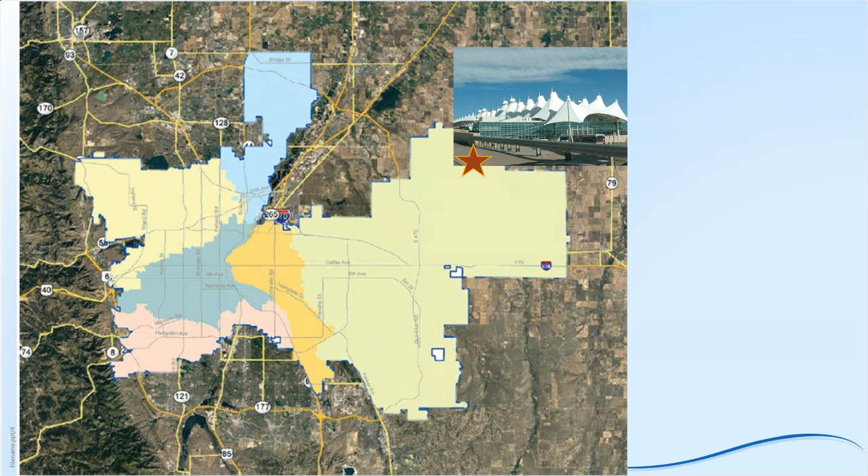So if any of you have traveled out to Denver, this is an aerial photo of Denver. You can barely make out the mountains on the left side of your screen here, just the foothills beginning of the Rockies. And what's shown in color is the service area. They have 6 basins, drainage basins within this district, and multiple connectors. If you need to get your bearings straight, you've probably at one time or another flown into the Denver International Airport, out on the east side of town. The downtown skyline, you can see the Rockies in the background there with a beautiful bright sunny day, and that's kind of where that sits on the map.

And then if you've ever had a chance to get out here and see a concert at the famous Red Rocks, that's on the west side of their service area for this particular district. So hopefully that helps everyone get their bearings straight and remember, if they've traveled out to Denver, where these features are. With respect to the treatment facilities, this whole service area is about 715 square miles, and it's a regional facility district that has 38 connector agencies, total of about 1.8 million customers throughout this entire service area. They operate 2 wastewater plants.

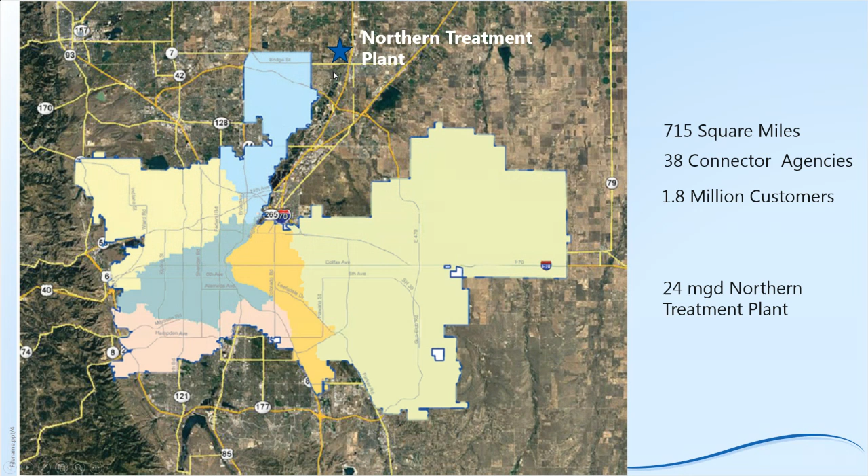Brand new plant that was just opened this year, started treating wastewater maybe 3-4 months ago. It has 24 MGD total capacity with the ability to expand up to 50 MGD, and they call that their northern treatment plant.

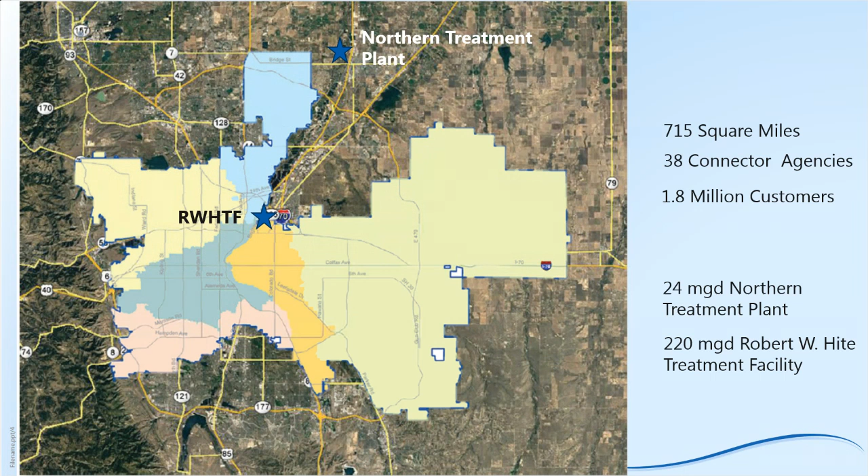And that serves some of the drainage area up on the north side of their service area. The facility we'll talk about today is the Robert W. Hite Treatment Facility, and that is their large facility. This is the largest wastewater plant west of the Mississippi all the way to the coast of California, at a 220 million gallon per day capacity.

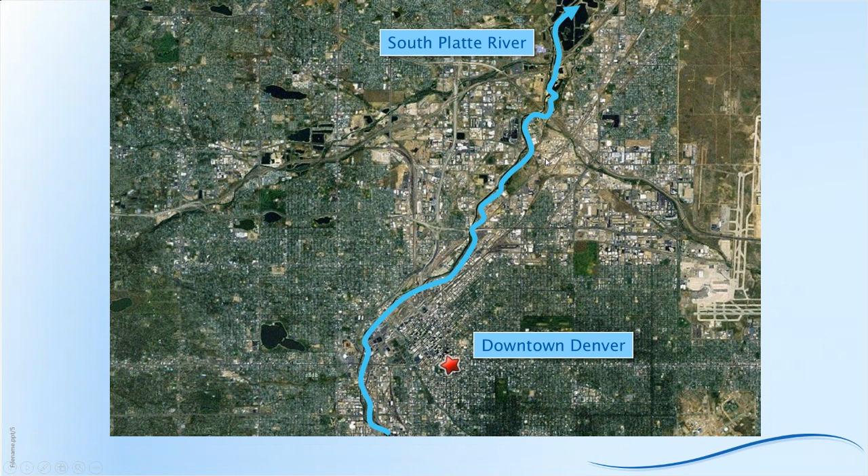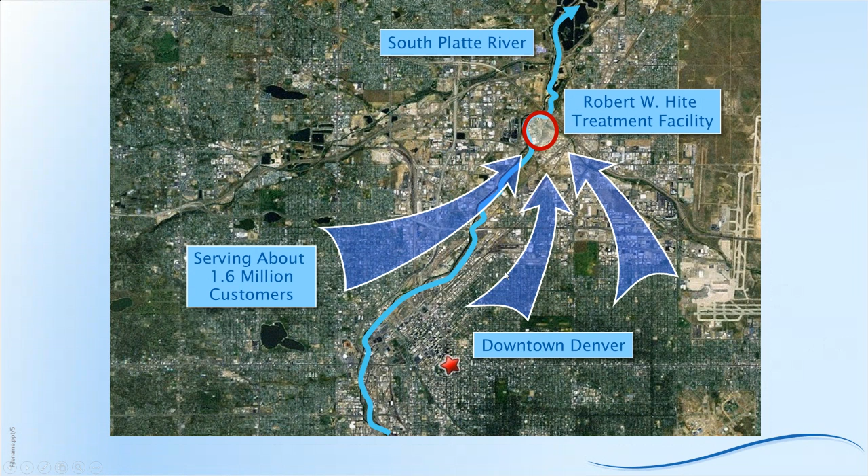So if I zoom in a little bit more on Denver, you can see DIA out here on the right-hand side, downtown in the center there. I traced the South Platte River, and in Colorado, the South Platte River flows north, eventually joining up all the way out to the Mississippi River. Where the river takes a big bend north of town, that's where the RWHTF treatment facility is located, and that particular facility serves about 1.6 million of their 1.8 million customers.

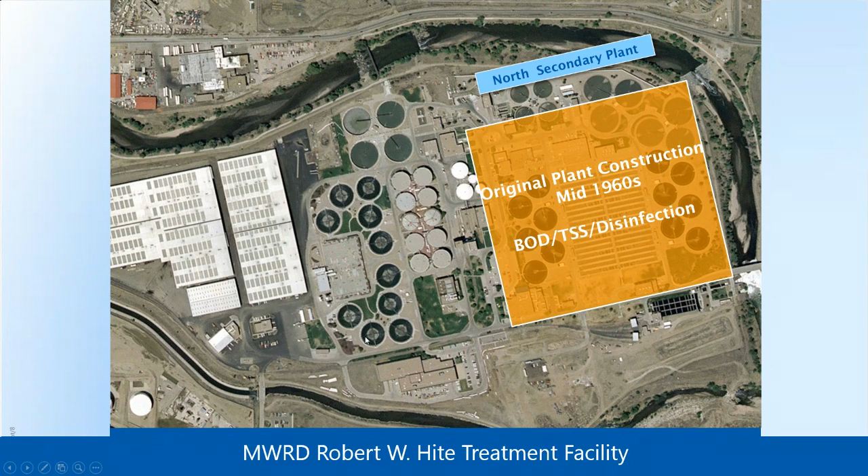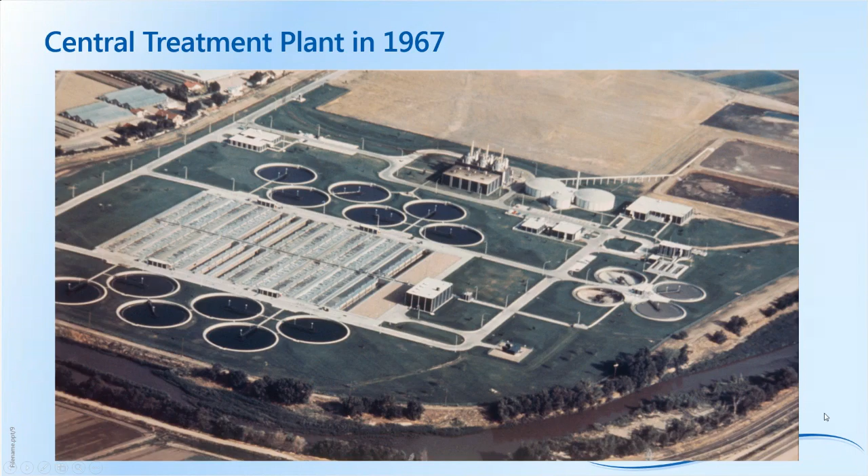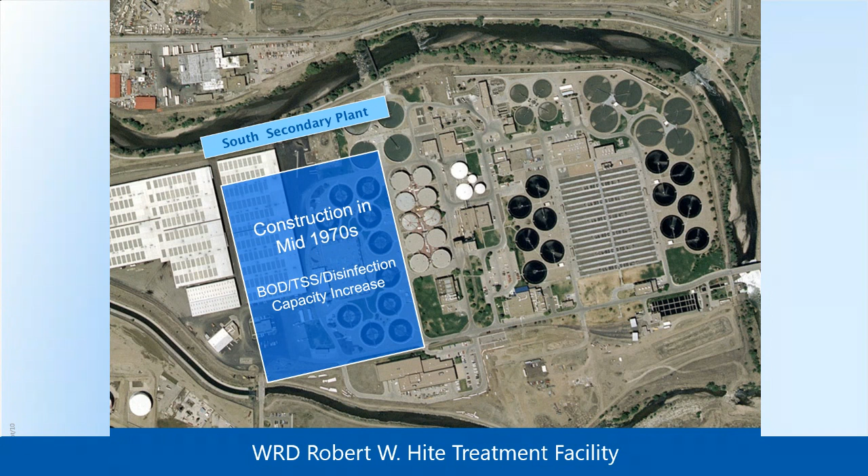With central digesters for solids handling, anaerobic digesters. You can see the pure oxygen activated sludge aeration basins here, surrounded by the 10 secondary clarifiers.

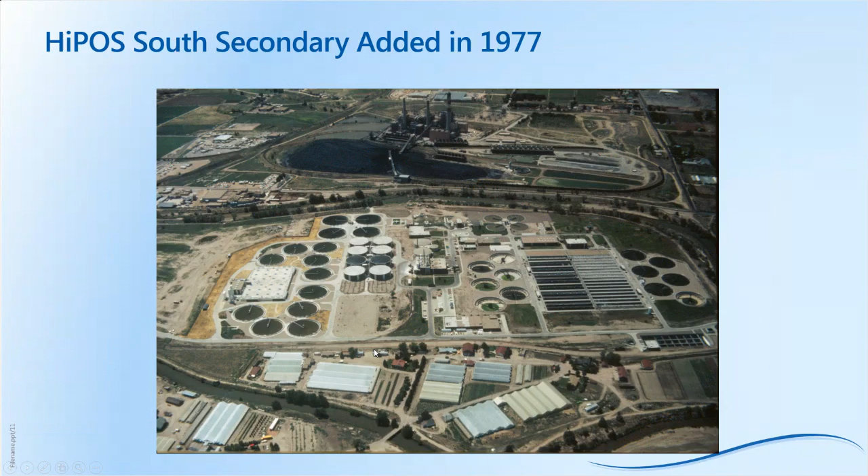In the early 1990s, nutrient criteria began to get more stringent on the South Platte River, and they modified the north complex to provide nitrification and partial denitrification. They combined the effluent from the pure oxygen south facility and the modified north facility to meet a seasonal effluent ammonia somewhere between 9 and 13 milligrams per liter, and a combined effluent nitrate of about 16 milligrams per liter. That was an improvement over no removal of nutrients under the former configuration.

This is an aerial photo from 1993 of the facility after the nitrification modifications were made. You really can't tell too much - most of the modifications were internal, plus the addition of a second blower building to accommodate the air demand for nitrification.

The sheds at the bottom of the photo are compost sheds. At that time, they composted about 10% of their total biosolids, and the remaining portion was applied on the METROGRO farms and some other farms east of Denver.

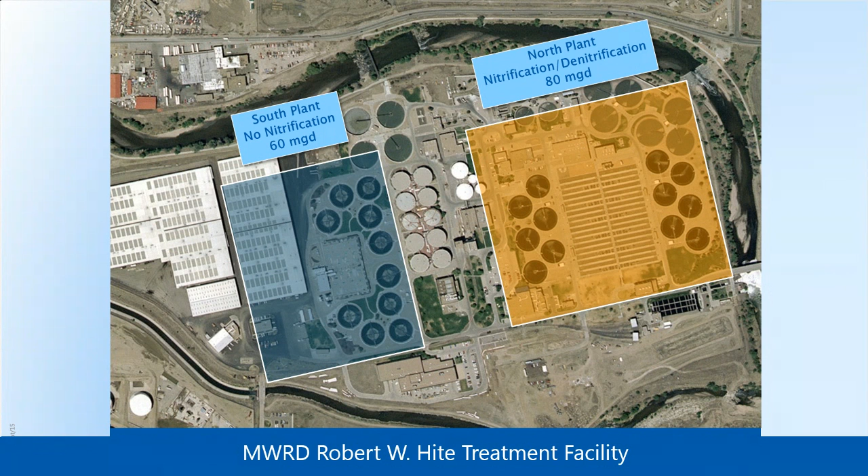So in the early 2000s, the district knew they were going to face more stringent discharge criteria on the South Platte, and they had to plan their strategy for nutrient reduction. At that time, the north facility effluent could nitrify, so their ammonias were generally less than 2 milligrams per liter, but only partially denitrify, so they were putting out about 12 to 17 milligrams per liter of nitrate.

That was combined with effluent from the South Plant. Now, the South Plant, being a pure oxygen activated sludge plant, did not remove any ammonia, so the ammonia that went out of this plant was essentially the ammonia that came in the raw wastewater, somewhere between 18 and 24 milligrams per liter.

At the same time, they didn't produce any nitrate because they weren't nitrifying. So the combined effluent was somewhere between 9 and 10 milligrams per liter of ammonia. They split the flow approximately 50-50 on an average day between the North Plant and the South Plant, so their blended effluent was about 50% of each of these effluent water qualities.

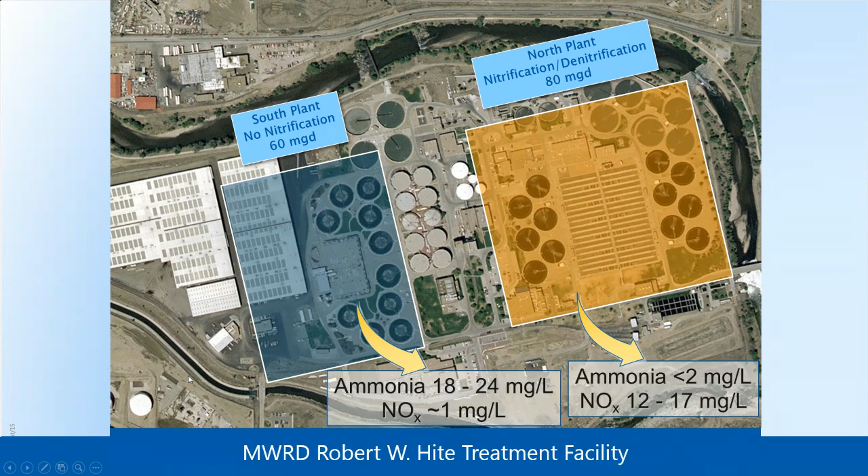And they decided the first step had to be improvements in the north secondary complex. The reason they needed to do that is because it was clear that the only way to modify the south secondary complex for improved nutrient removal, both ammonia and nitrogen, was to take at least half of the capacity out of service at a time to make those modifications.

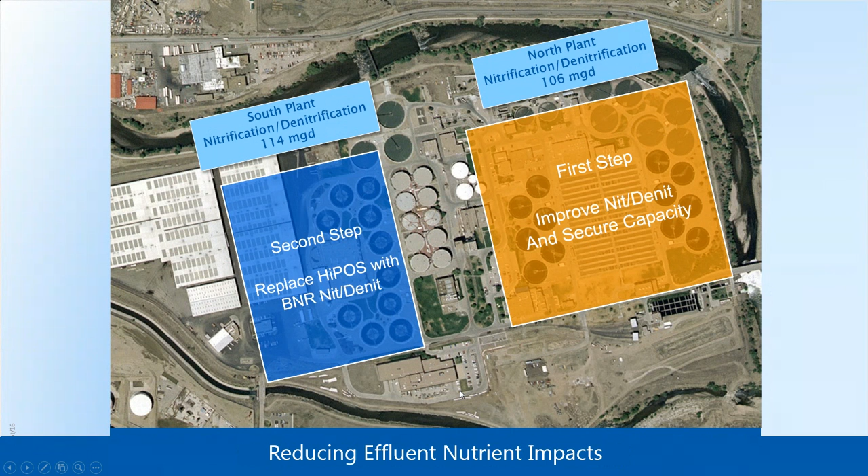In order to take half of the capacity out of service, they needed to gain capacity in the north facility. So that's what they did first, and that design started in about 2004 and finished up, and then was succeeded by the second step, which was to replace the pure oxygen facility with a BNR facility capable of nitrification, denitrification, and even modifications in the future for phosphorus reduction.

So one of the interesting things that came out of this plan was developed, the design, in about 2004 for the North Complex. And in 2004, the industry was beginning to think about side stream treatment as a big benefit to our treatment plants, but there weren't a whole lot of facilities practicing side stream treatment.

Today, side stream treatment is a major part of many agencies' game. They understand that if they have to meet a nutrient criteria and they can remove that in a concentrated form from their return streams if they have anaerobic digestion, then it's much more cost effective.

But this was relatively early in the development of side stream treatment process, and the district elected to use a process called CaRRB. Now, some of you may or may not have heard of CaRRB. There's a lot of talk about Anammox-based side stream treatment, and CaRRB is an aerobically based side stream treatment that essentially means Centrate and RAS Re-aeration Basins.

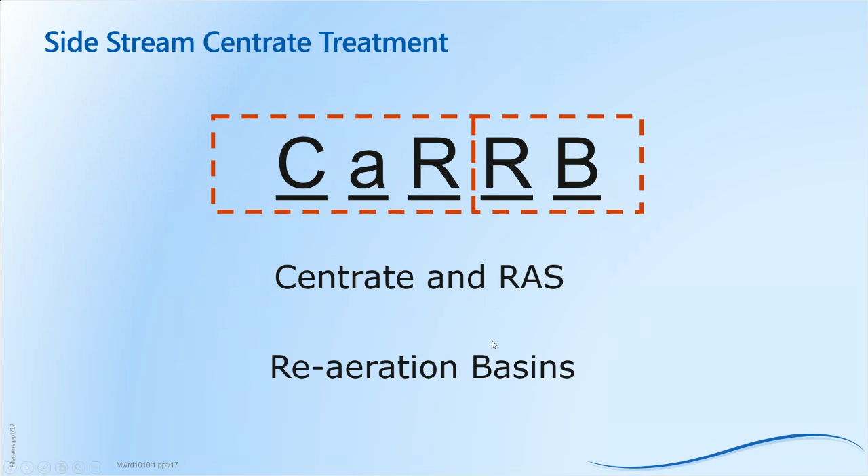I'll show you what the CaRRB looked like in the north complex, and then I'll show you how CaRRB was incorporated into the south secondary complex as well. So the reason that CaRRB and side stream treatment in general is attractive to the industry is the cost-effective nature of it.

This agency looked at expanding the north complex by adding 2 more aeration basins and 2 more clarifiers. Their clarifiers are 30-foot diameter in the north complex and about a 2 million gallon aeration basin. So the cost of that to gain 18 MGD was about just under $40 million. On a unit cost basis, that's about $2.25 per gallon of capacity increase.

They compared that to side stream treatment, which they could gain 22 MGD of capacity at a cost of about $21 million, which equates to just under $1 per gallon. So we're looking at about a 50% capital cost savings by doing what they needed to do in side stream treatment rather than mainstream treatment. And that number, I think, is generally reasonable, about half the cost for most other agencies across the country to use side stream versus mainstream treatment if you have the opportunity.

So I would encourage everyone to be looking at side stream treatment if they have nutrient challenges in the future, because it can be a very cost-effective opportunity.

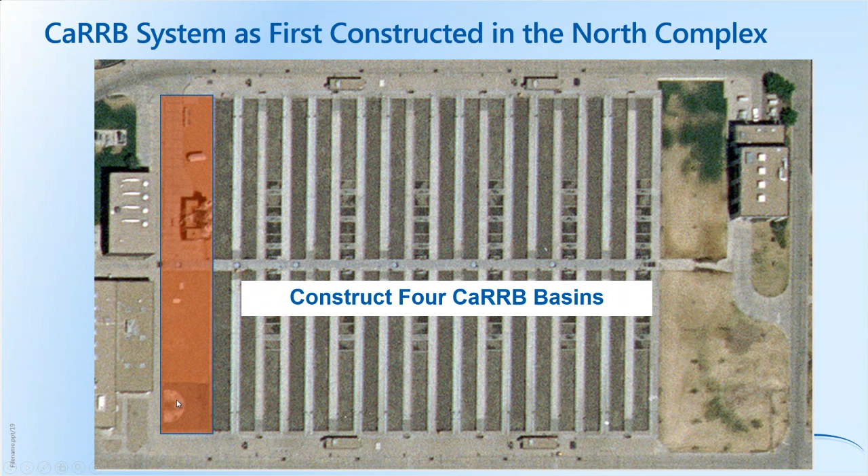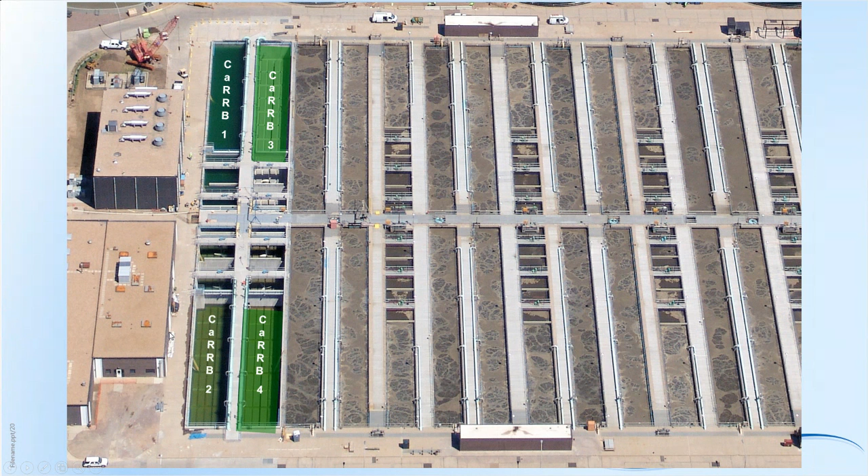So this is an aerial photo, a little bit grainy, of how they incorporated CaRRB into the north complex. They constructed 4 CaRRB basins in the area that was actually available where aeration basins were not currently constructed, and this is what those 4 basins look like. They're essentially parallel — I'll show you the flow pattern in a second. This is an aerial photo of the 4 CaRRB basins after they've been constructed. The odd-numbered CaRRB basins match up with the odd-numbered aeration basins on the top of the page, and the even numbers on the bottom match up with the even-numbered aeration basins.

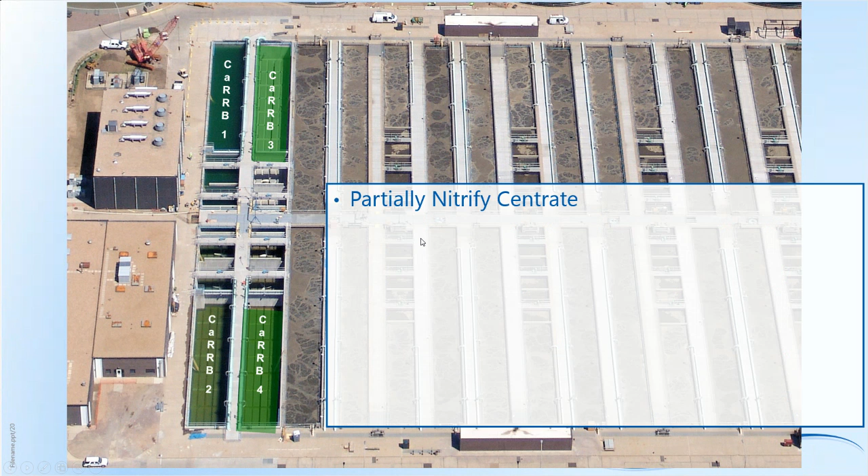So the advantages of CaRRB as a side stream treatment is they're able to partially nitrify the centrate return. And in this case, because all of the centrate from the entire plant was treated in the north complex only, there was an imbalance compared to normal plants with the ammonia load from centrate that comes to this north plant. So this CaRRB treatment for side stream was very beneficial and important in this case.

CaRRB not only partially nitrifies the centrate, but it generates nitrate for denitrification in the anoxic zones of the BNR facility. It's kind of equivalent to the function of internal mixed liquor recycle. So where a normal plant might use a rule of thumb of 300% internal mixed liquor recycle for denitrification, this facility only has about 200% IMLR because the CaRRB basins provide the rest of the nitrate to be denitrified.

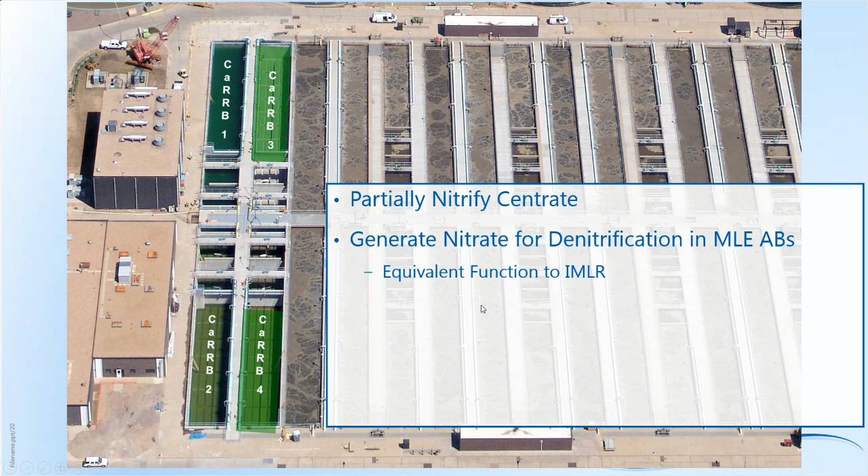Also in CaRRB, it runs off a RAS feed. RAS is generally about twice or a little bit higher concentration than the mixed liquor in the aeration basins. Because they're running at 6,000 milligrams per liter, the size of the CaRRB basins required for nitrification are significantly smaller, about half of the size of conventional treatment. This also allows the agency to reduce the mixed liquor in the aeration basins so they can reduce the solids loading on the secondary clarifiers.

The secondary clarifiers were the capacity limiting process at this particular plant, and anything they could do to reduce the loading or improve the performance of the clarifiers was necessary.

The other big benefit of the CaRRB side stream treatment is essentially we're growing nitrifiers in a very high ammonia concentration environment with the centrate as the substrate. And therefore, I like to call them super nitrifiers that are grown there. The nitrifier population is very strong, robust, and high, and that is fed back into the mainstream process, which bio-augments the performance of the mainstream process.

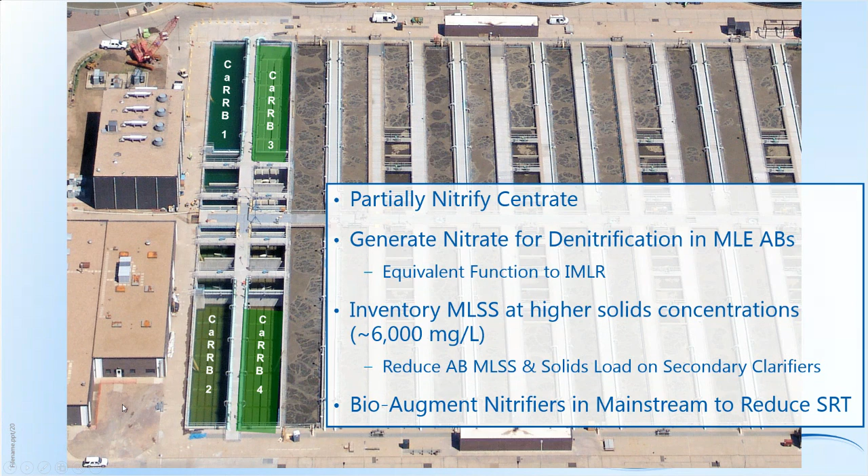I'll give you an example. The mainstream was designed for an aerobic SRT of about 4.3 days, and this agency, after they put CaRRB online, tried to see where the bottom was, and in the dead of winter ran the aerobic SRT down to 3.5 days without a breakthrough of ammonia. That represents about a 25% reduction in SRT over what they were designed for, and we do believe that some of that reduction is definitely due to the bioaugmentation properties of a side stream treatment in this manner.

So that's all kind of a setup for the grand prize winning project, the South Secondary Improvements Project. Let's take a quick look at that.

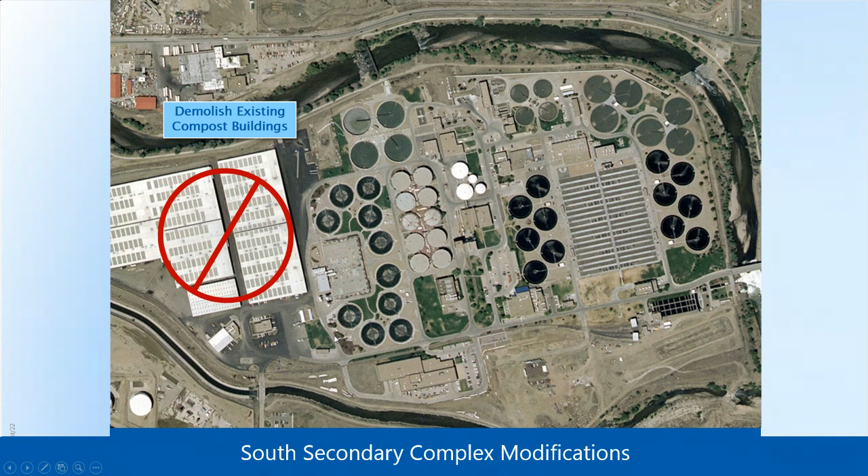The first thing that the agency had to do in order to modify the South Secondary Complex from pure oxygen to BNR activated sludge was to demolish the compost buildings to make room for the new facility. After those were demolished, they were able to construct a new BNR activated sludge plant. You can see the size of this is about 3 times the size of the pure oxygen aeration basin.

That makes sense because pure oxygen runs at somewhere between 1 to 1.5 days SRT biomass, and BNR runs somewhere between 4.5 to 6 days. So generally, we're looking at 3 to 4 times the aeration basin volume when moving from pure oxygen to BNR activated sludge, and you can see that with the footprint difference here.

At the same time they were building the new BNR activated sludge, they had to modify the west HiPOS. Those pure oxygen basins were no longer needed, and that space was valuable for some of the new facilities that had to be constructed to make the whole system work and perform at the right level.

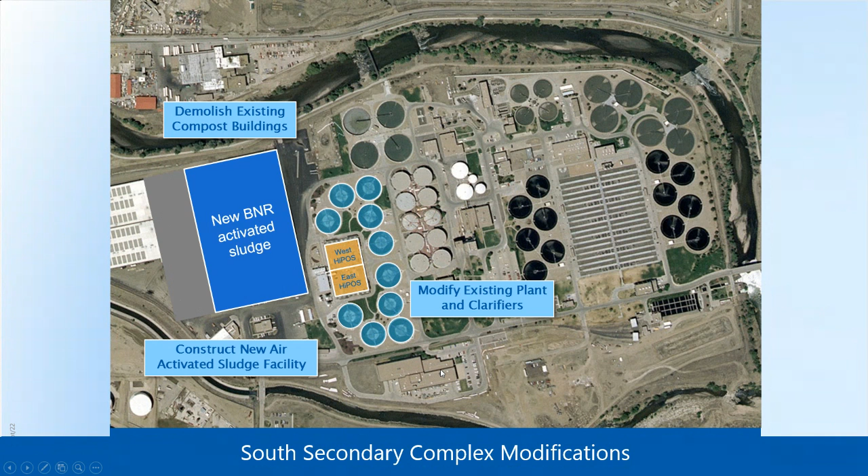Once that was completed and half of the facility was online, they then took out the east HiPOS and made the exact same modifications on the east side and are currently now running with all the facilities in service.

So in order to accomplish this, we have to take a stepwise approach moving into the project. The first step was to demo the composting buildings to clear the site and prep the site both with some pre-excavation and some utility relocations in order to construct the new facility.

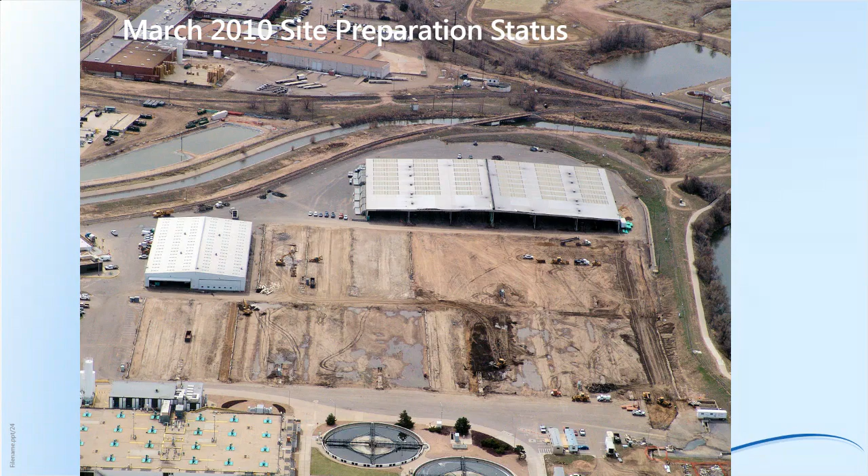That began in about January 2010. In March 2010, a couple months later, we can see that the compost buildings are largely removed. In September 2010, they began working on the pre-excavation of the area that the new facility would be constructed in. And by January 2011, just about the time that the larger project was bid, the site was cleared, all the utilities were relocated, and some pre-excavation had begun to expedite the construction of the aeration basins in this area.

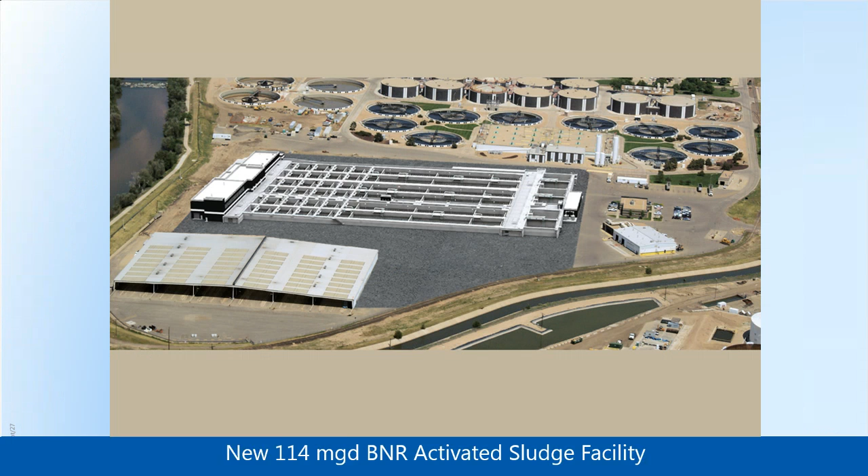So what was built in the area? Let me give you a quick tour. The facility has a capacity of 114 MGD out of the total 220 at this site. It consists of 6 parallel aeration basins, and these are single-pass aeration basins.

There's a conventional, probably urban legend, that BNR aeration basins have to be multiple pass to make it easier for mixed liquor return through the wall, to make them more cost-effective. And that really isn't the case. Any configuration of passes is acceptable for BNR. This particular design is a single pass, and there are several examples of single pass BNR basins throughout the country. So that's the aeration basins. The head part of the aeration basins is the anoxic zones for nitrate reduction, and in fact there are some anaerobic zones as well in this design that allow for future biological phosphorus removal.

CaRRB was also incorporated into the South Secondary, for side stream treatment of the ammonia return from dewatering of anaerobically digested sludge. In this case, we started with a clean slate, so we were able to locate CaRRB in an ideal position for the best, most cost-effective construction of the facility. It happened to be at the tail end of the process, and I'll show you the flow pattern momentarily.

We created a west mechanical building, and this supported the cost effectiveness of this facility. Not only were all of the aeration basins common walled together, but the main mechanical complex was all in a single building in 3 parts.

The first part in red is the primary effluent pump station. They did have to lift into this plant because the hydraulic profile of the existing plant had the primary treatment at a lower elevation than secondary treatment. So they were lifting into the pure oxygen basins, to catch the hydraulic profile that existed in the existing plant.

The second main portion of the west mechanical building is the blower building, and this is where all of the blowers, air supply equipment for the complex is housed.

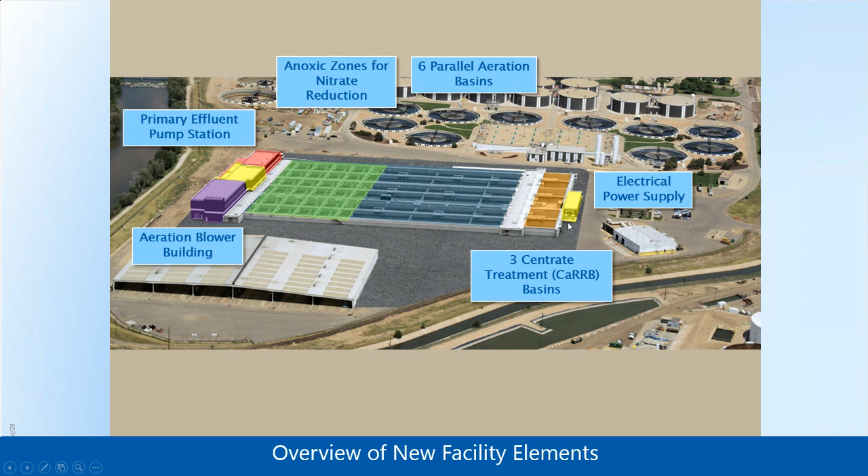In between the pump station and the blower building, where almost all of the load for this facility resides, is the electrical power supply, shown in yellow. That also added to the cost effectiveness, all in the same building. The wiring costs, the amount of copper, the line losses, all were dramatically reduced by placing that building in between the 2 highest loads. There was a second electrical building on the east side of the complex to supply some power needs on that side.

The facility includes mechanical equipment and piping utility galleries: a west gallery located alongside the west mechanical building, a central gallery, and an east gallery. These house all of the equipment so that in inclement weather, cold times in Denver, they're able to do all of their work inside on this facility where most of the piping and mechanical equipment resides.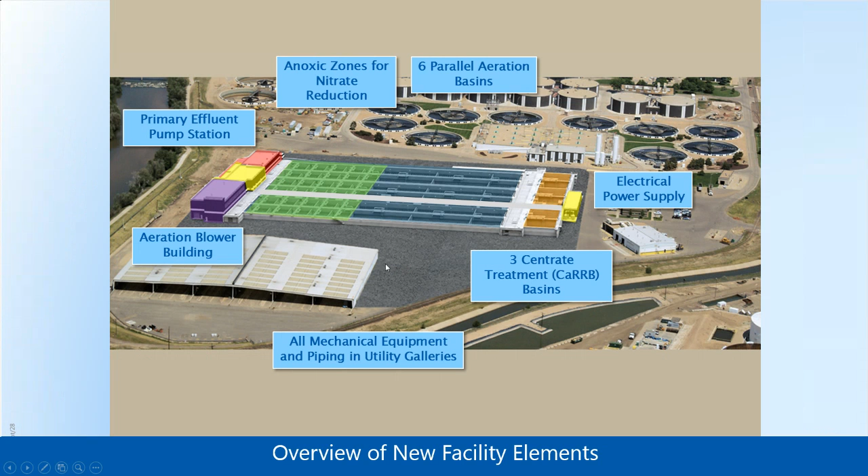After the aeration basins, we flow to the existing plant where we modified the facilities to include Stage 5 post-aeration, and the Stage 5 is there to support a future Stage 4. So you'll see a common 5-stage process, maybe we can call it Bardenpho flow, for phosphorus and nitrogen reduction here, with a second anoxic stage in the future and a Stage 5 aerobic polishing prior to split to the clarifiers.

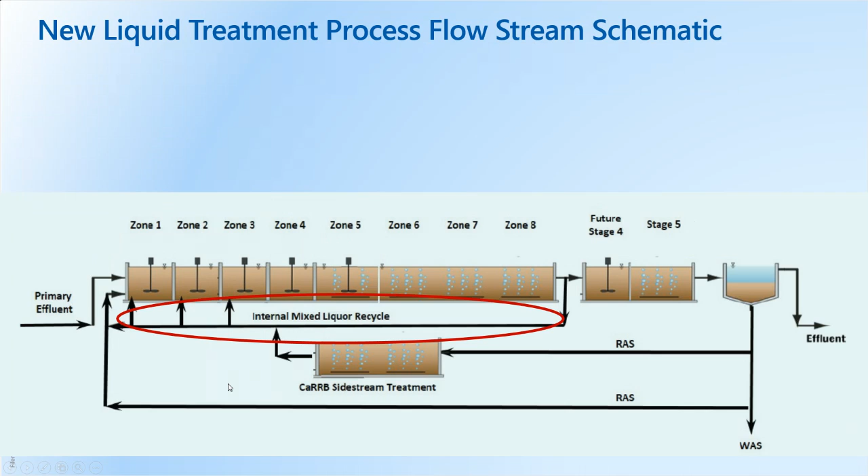So Zone 5 is the swing zone, and then of course the future Stage 4 and the CaRRB side stream treatment. The other feature is that the internal mixed liquor recycle and the CaRRB effluent come through a return channel that allows us to feed that liquor into either the first, second, or third zone, depending on the goals we're trying to meet for nitrogen and phosphorus.

Of course, it's 114 MGD capacity, $150 million overall. This piece of the complex cost about $134 million.

The footprint is 700 feet long, so it's all one structure, about 350 feet wide with the 6 aeration basins, and the aeration basins are 20-foot sidewater depth. About 74,000 cubic yards of concrete was used to construct this single structure.

The primary effluent pump station, located right here, consists of 5 56 MGD pumps, each with 450 VFD-driven motors.

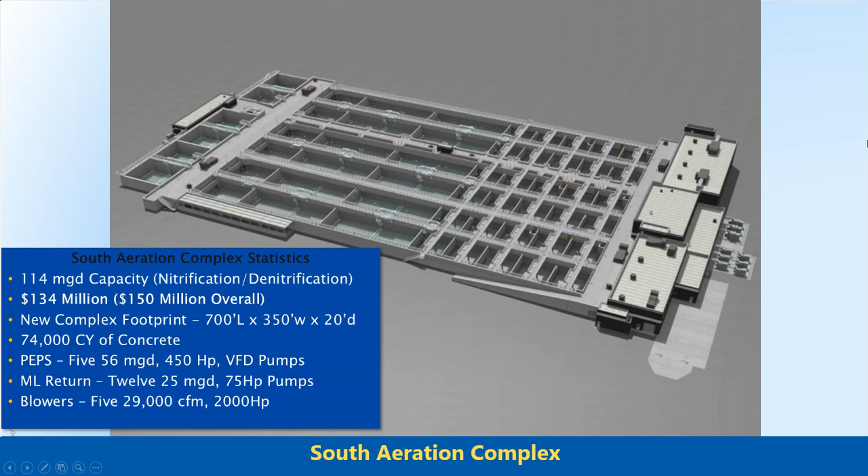On the end of the basins, there are 12, 2 per basin, 25 MGD, 75 horsepower mixed liquor return pumps that bring the mixed liquor back to the head of the facility. And in the blower building, there's 5 single-stage, 29,000 CFM, 2,000 horsepower blowers, and we'll take a look at those in a second. I think one of the very compelling and interesting things about this facility was the cost.

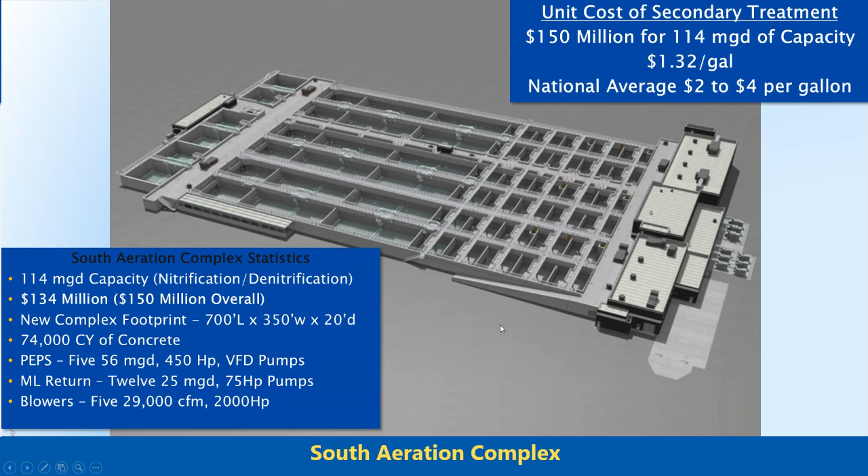At $150 million for 114 MGD, that's about $1.32 per gallon of capacity. The national average for secondary treatment capacity is somewhere between $2 to $4 per gallon.

So this facility far undercosted the national average, and part of the reason was related to all of the common basins that we've built, the common mechanical building, the straight piping galleries that allowed us to be more efficient with the piping and mechanical equipment, all contributing to the lower cost of this facility compared to others.

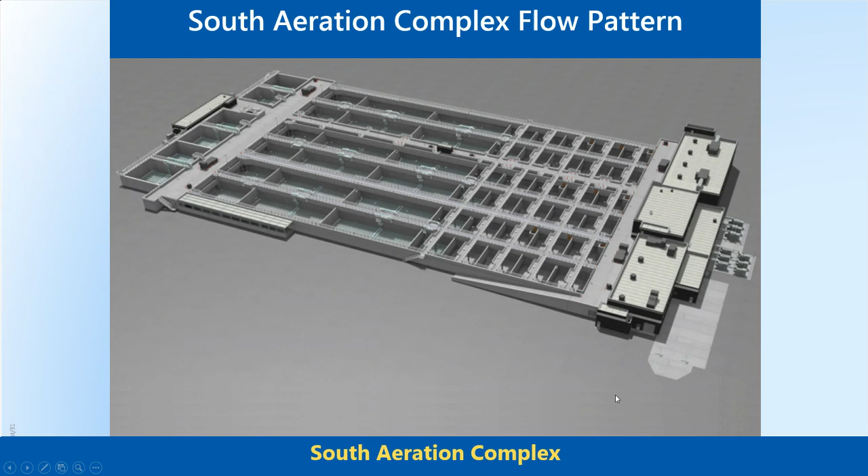So with regard to flow pattern, primary effluent comes into the wet well that's located at the head of the primary effluent pump station and then is lifted into the head of each of the 6 aeration basins.

Return activated sludge is pumped from the 10 clarifiers into the head of the aeration basins in a separate feed line.

RAS is also put into the CaRRB side stream treatment along with Centrate, and really the RAS is the biofuel, if you will, the biology that allows us to nitrify the Centrate in the side stream treatment.

The effluent from the Centrate treatment and the mixed liquor return all combine in channels that run back to the head of the complex and then allow us to distribute that flow either at the head of the plant with the primary effluent and the RAS or into the various zone compartments.

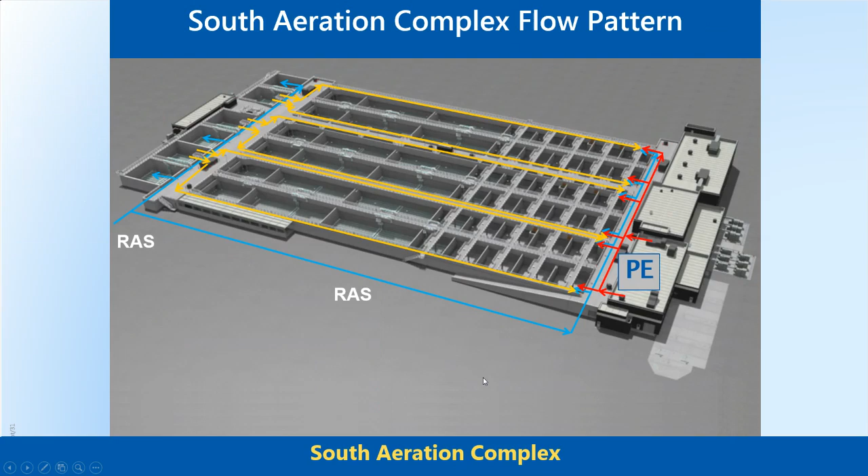Most of the project and much of the cost was in the new South Aeration complex, but some of it was also in modifying the existing facilities.

So all of the secondary clarifiers were rehabbed, first the west side. A new stage 5 was constructed and a splitter box to those 5 clarifiers, repurposed inside of the existing basin, and new RAS-WAS pump station.

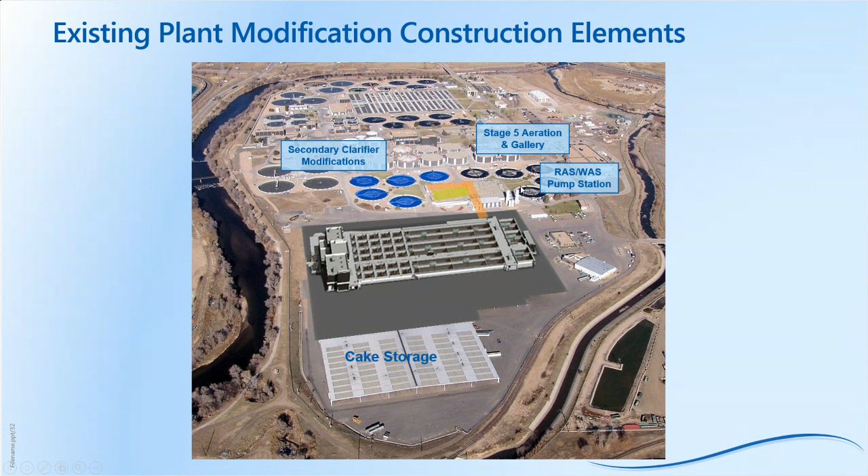And this modifications and repurposing was repeated then on the east side of the facility after what you see here on the screen was started and operational.

And the operations and engineering team at Metro got a lot out of the 3D. It expedited design. They were able to visualize and see what the facility would look like, and it was very accurate to the final end product.

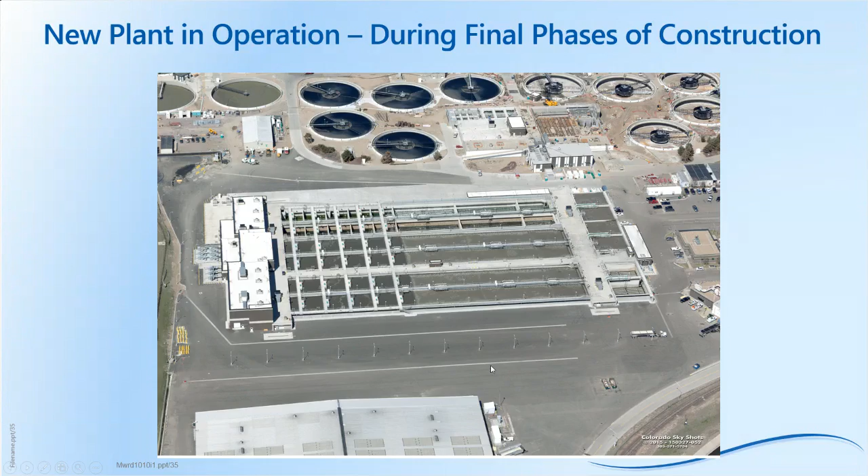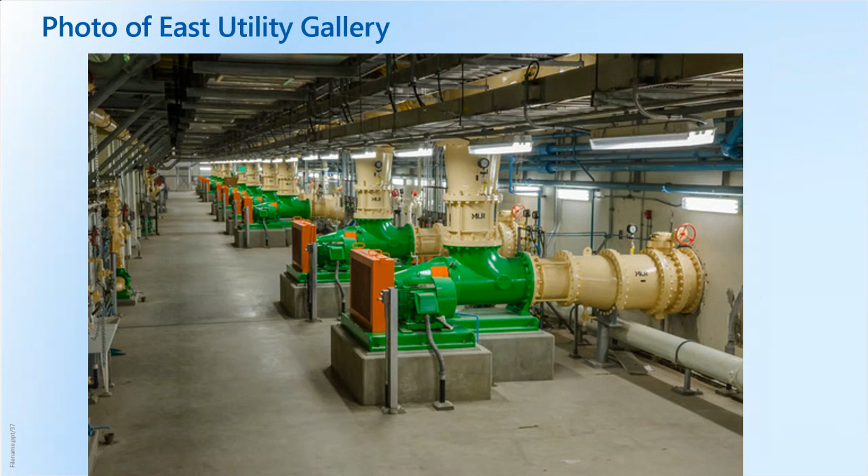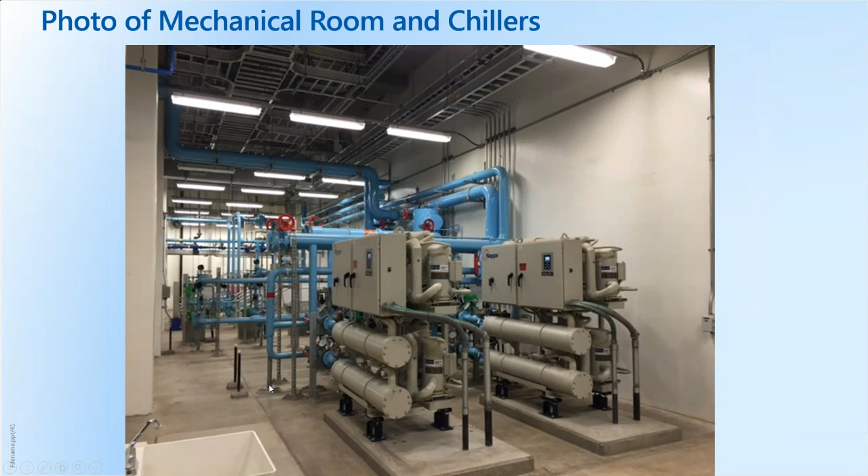So very realistic view of what the agency will get, all the way down to the small mechanical equipment that was also designed in 3D and rendered so the operators could understand how they can move around the facility and access the equipment. And then, of course, the actual finished product looks very similar to what came out of the CAD.

The 3D model was also used during construction, particularly for the concrete construction. All of the pours proposed by the contractor were incorporated into the 3D CAD file, and we could virtually build all of the concrete pours on screen with the contractor to determine appropriate sequencing and a more efficient activity base.

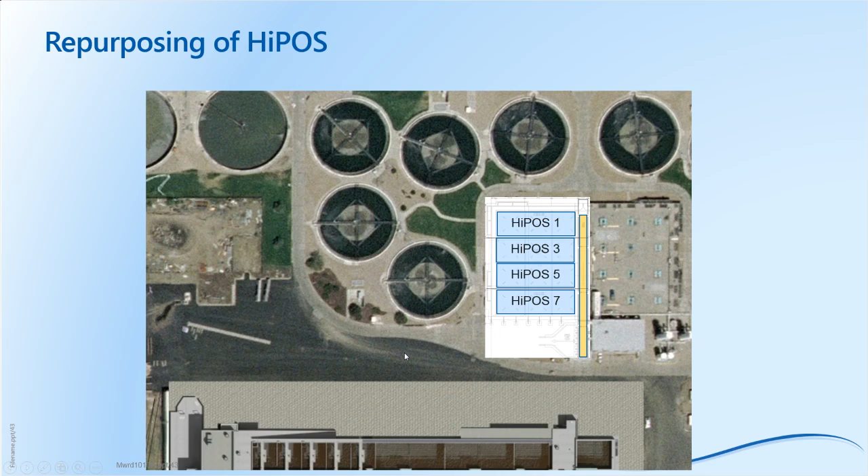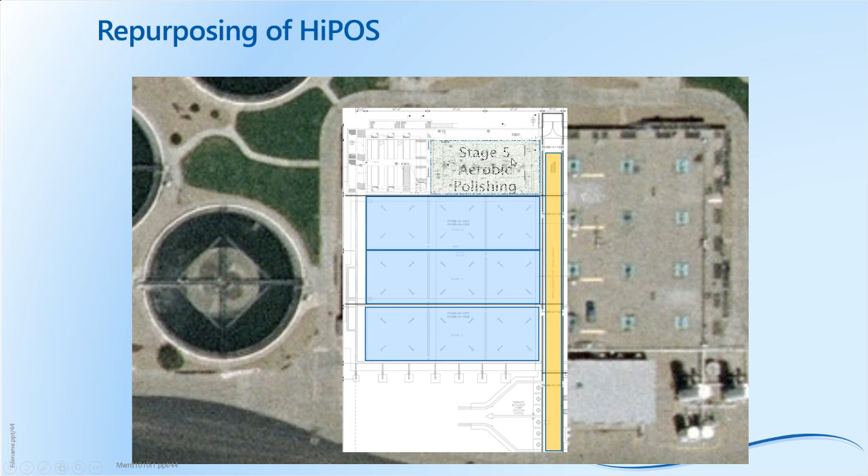The other thing that was done was some repurposing, particularly of the existing HiPOS basin. This shows the 6 secondary clarifiers and the pure oxygen aeration basin, with a corner of the 3D image of the new activated sludge complex visible. In this pure oxygen system, there's a feed channel with 4 high purity oxygen basins on one side and a mirror image 4 basins on the other side, for a total of 8 basins. This is a close-up of that, showing the removal of one of the pure oxygen aeration basins, replaced with stage 5 aerobic polishing and a gravity mixed liquor split box.

Prior to construction of this box, the split of mixed liquor to the secondary clarifiers was done through modulating gates off of a common channel. They had wide variations of splits to each clarifier because the modulating gates were chasing their tail and hard to control. So they moved to a definitive gravity split, and now have an exact split between all the clarifiers.

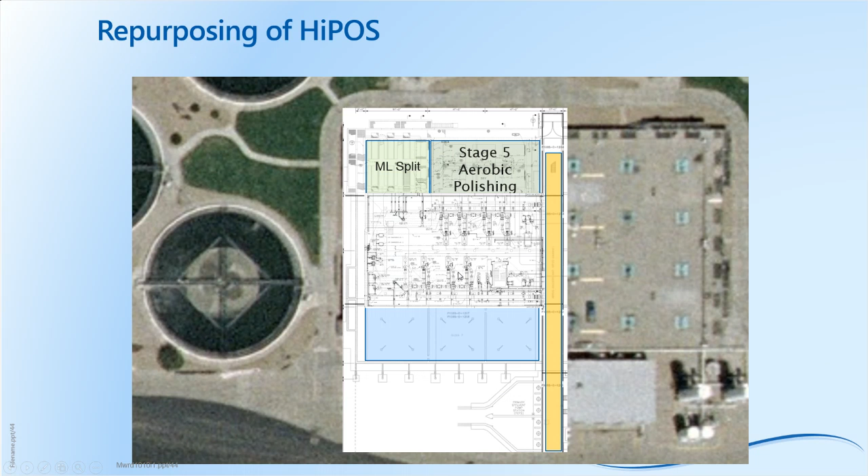In 2 of the other basins, the RASWAS pump station was constructed, in a central location. There was essentially no space around the site on the perimeter of the clarifiers to build a RASWAS pump station, and this represented the best location since all of the clarifiers come into a central location here. So this facility was repurposed for RASWAS, and they even left the final HiPOS basin decommissioned and available for future stage 4D nitrification. All of this was repeated as a mirror image on the other side of the facility.

This is a photo of the repurposing construction. You can see there's rehab of the clarifiers going on. This side of the plant on the east, on the right side of the screen, is operational still, with all of the aeration basins operational as well. They're modifying both the RASWAS pump station, stage 5, and the mixed liquor split box.

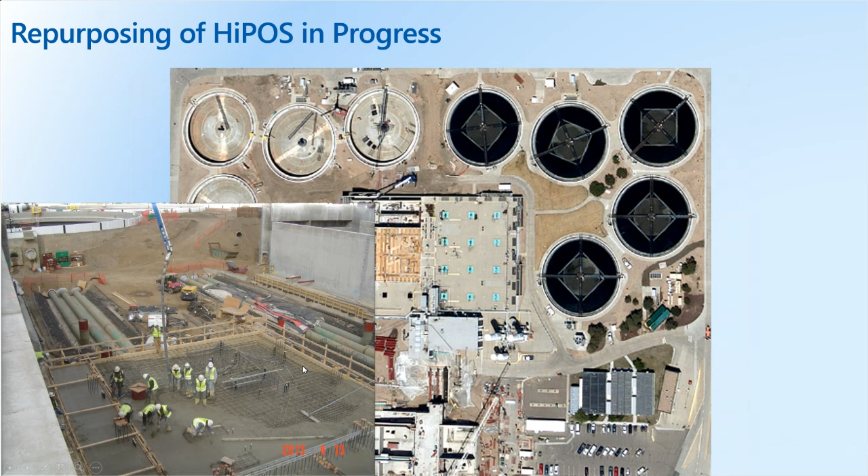Here's a picture of the work done in repurposing to create the RASWAS pump station. These are the suction pipes for RAS, and they're pouring the slab that the RAS pumps will sit on. This is a shot of the work being performed on the mixed liquor split box in the repurposed basin. These walls were existing walls from the existing complex.

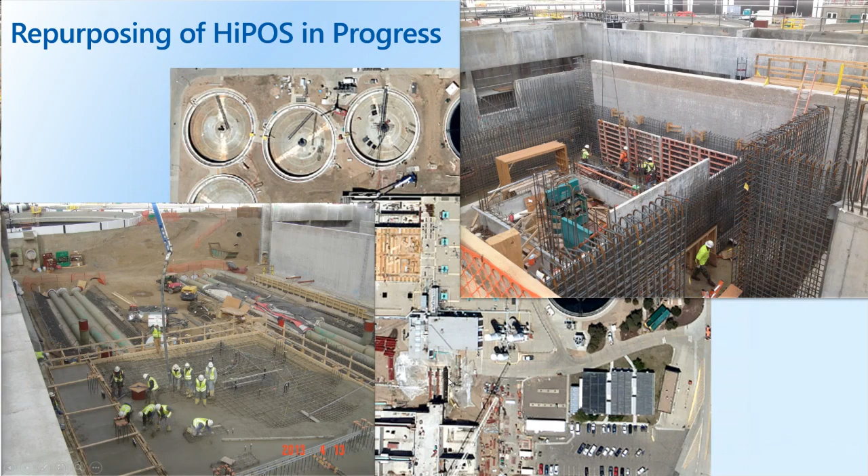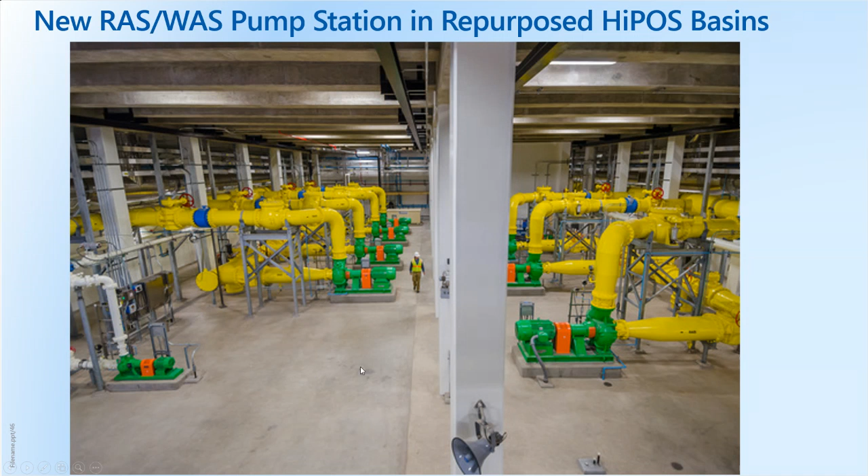This is the finished product of the RASWAS pump station, and you can kind of see the line where these columns are. This was one HiPOS aeration basin, and this was a second. You can see how this provided a great space with ample room to work around all of the pumps and discharge piping within this area for a very nice RASWAS facility.

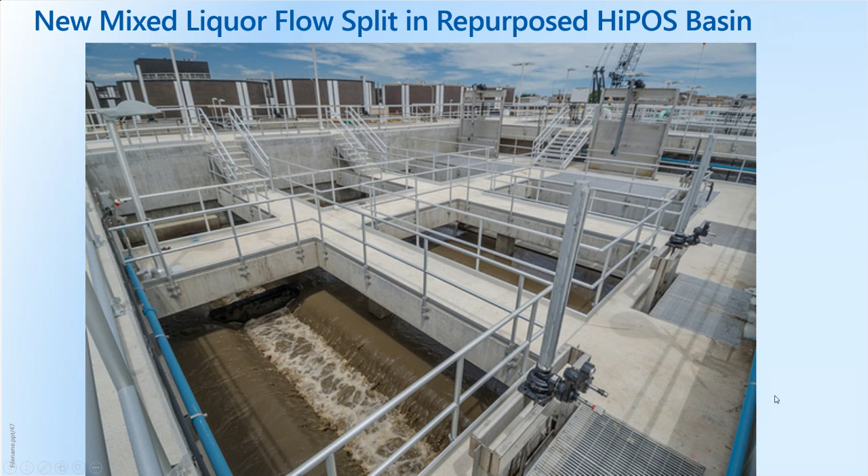These are the new clarifiers that were constructed, and one of the most important features is the maze-type energy dissipating inlet, EDI. It was also combined with suction header sludge collection mechanisms.

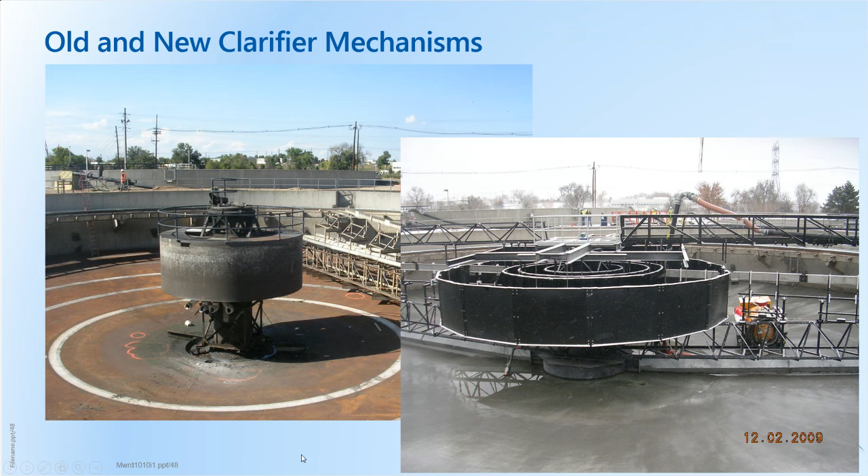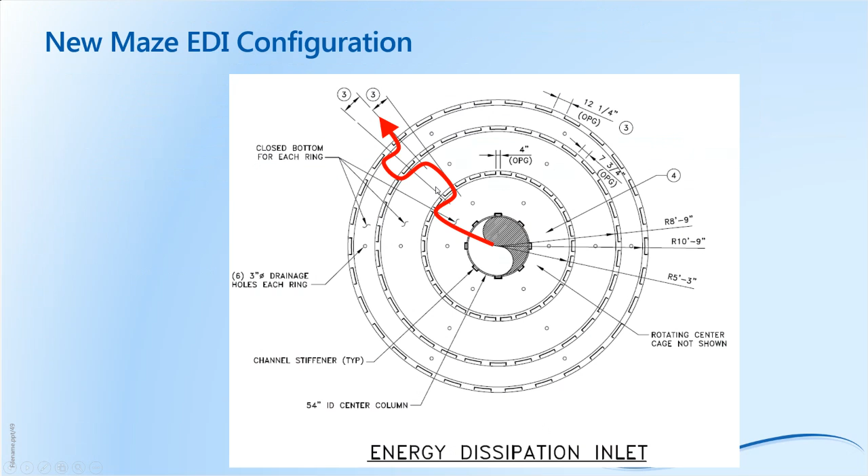This is a view of the maze EDI, and it shows what this is all about. This is the influent well, and the flow comes in and has to travel through a tortuous path to get out of this EDI into the flocculation well. That dissipates the energy as it hits the baffle and then has to go around the baffle to get out the next set of baffles. You can see that the net openings in the first ring are small, get a little bigger in the second ring, and finally bigger still in the third ring. What that does is reduce the velocity of the mixed liquor as you go through the maze.

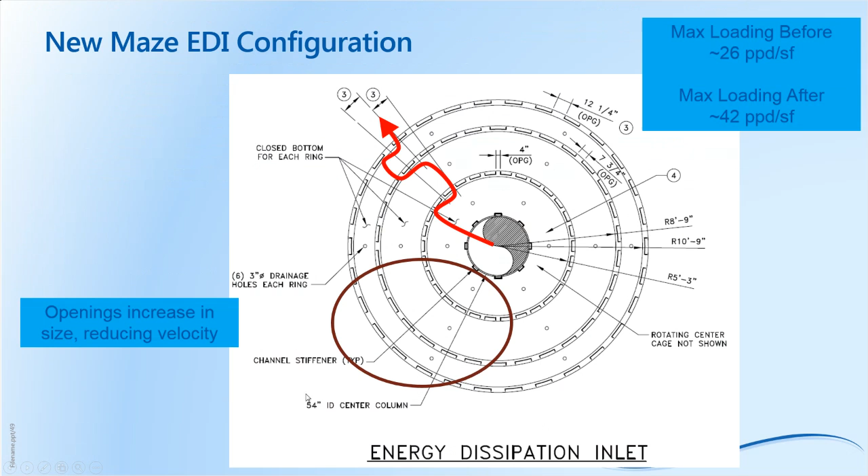The end result of this was: before this energy dissipating inlet was installed, they could run about a max of 26 pounds per day per square foot. Now they can run up to about 42 pounds per day per square foot. That's how important energy dissipation is in the inlet.

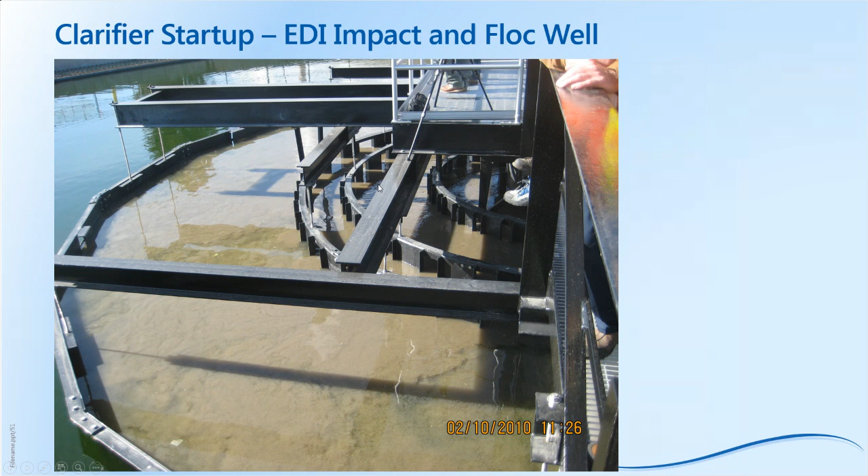It shows the maze EDI, the flocculation well, and the suction headers that were put in. This is the EDI in action. You can see some of the turbulence here, and you can see that it slows down through the maze into the floc well, and we have really good flocculation in the floc well.

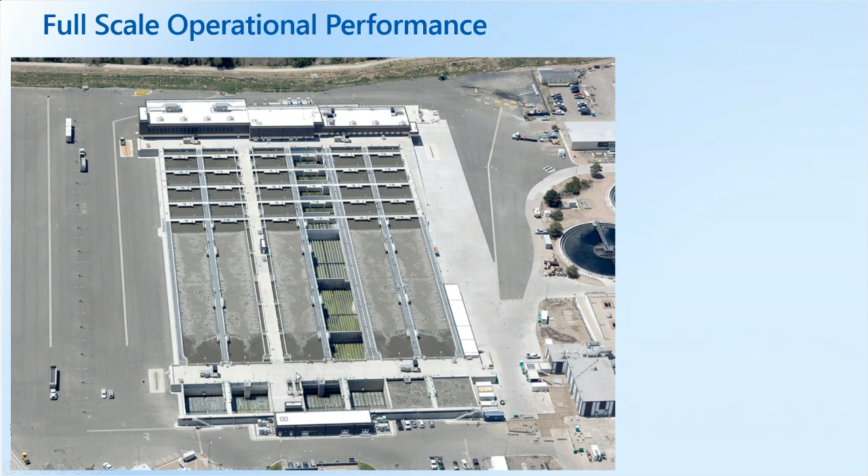So the NPDES permit for this facility has a summertime maximum number, so this is the lowest number they have to meet, at 1.75 milligram per liter of ammonia. And their nitrate plus nitrite, or NOx value, that they have to meet is 8.68. They have an 85% goal to beat that, to operate at only 85% of their limit or less. So that's about 1.5 milligram per liter of ammonia, 7.4 milligram per liter of nitrate, and 1 milligram per liter of phosphorus when they try to do phosphorus removal.

With all this facility operational and treating its max capacity, they run about under 1 milligram per liter of ammonia, under 5 milligram per liter of nitrate and nitrite, and under 1 milligram per liter of phosphorus.

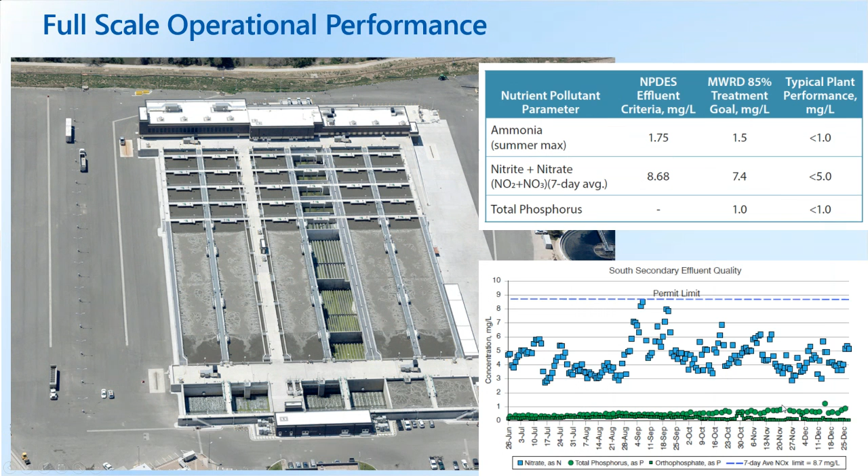This is a chart that shows the effluent quality through a 6-month period. The nitrate is the blue line here, and you can see that they never violated their permit. They got a little close at one time of year as they went through the transition between summer into fall, brought that back around by adjusting their SRTs, and normally run less than 5 milligram per liter out of this plant. The total phosphorus is shown in green, and they're normally well below 1 milligram per liter when they're balancing both phosphorus and nitrogen removal.

They don't currently have a phosphorus limit, but they did want to test out and see what their performance looked like for phosphorus. The end result was about 4 million pounds per year of nitrogen removed from the South Platte River.

This is a look at the ammonia concentrations before the project went online. In 2013, they were up to somewhere between 10 to 15 milligram per liter of ammonia in the combined effluent. When they got a portion of the plant online, that dropped somewhere between 4 and 10, and then after the entire plant was online, they're consistently below 2 milligram per liter.

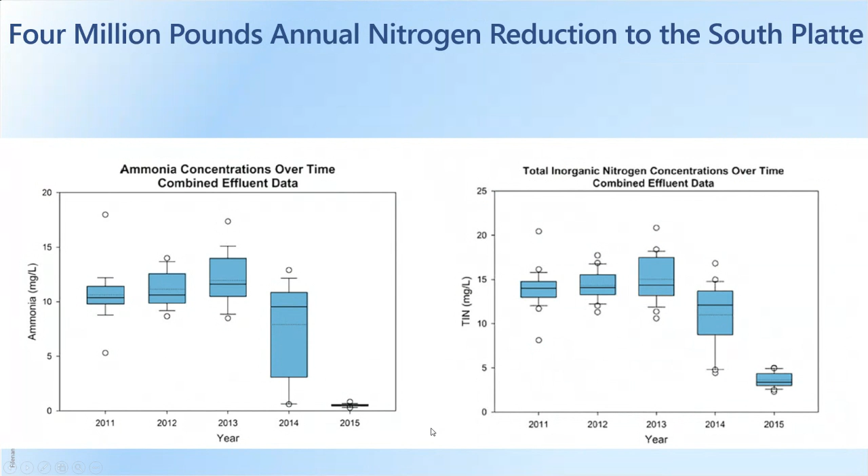Same thing with the total inorganic nitrogen, the TIN. They were generally, before any of the facility came online, in the 12 to 18 milligram per liter range. When half the facility went online, they dropped that down to 10 to 15, and when the full facility came online, they're generally running at 5 milligram per liter or below. Again, the result: 4 million pounds of nitrogen out of the South Platte River based on this process.

The other interesting thing that Metro has done - they've done a lot of pioneering things, this agency, including their side stream treatment processes and many other things - but they also have a focus on energy savings through what I'll call low-DO operation, and this kind of represents that.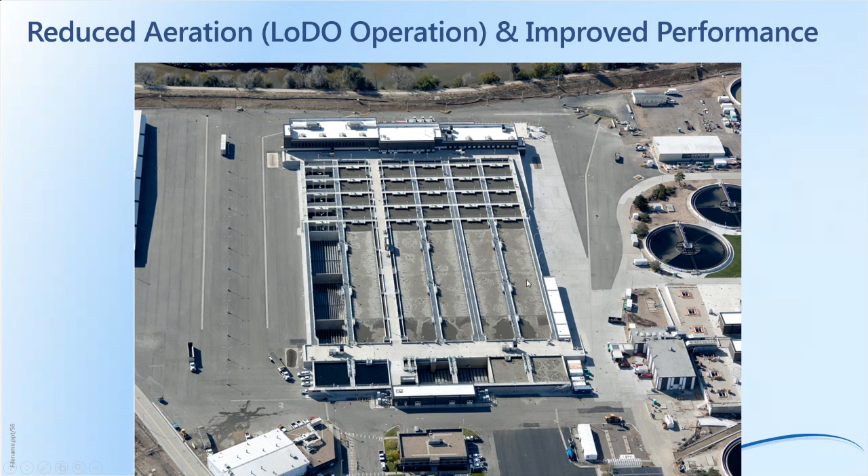You can clearly see the aerobic zone here, and they've reduced their DO residual in this zone somewhere between 0.5 and 1.5 milligram per liter. And they do this through direct ammonia control and also by making sure their set points are as low as possible to get the treatment they need.

They've actually, you can see here, turned the air off of the final aerobic grid or aerobic zone to save more energy. So they're operating with anaerobic zone and anoxic zone with much of the volume up front, and then also at the tail end of the process in an anoxic condition.

With that operation, they're able to treat 114 MGD because we ran the facility up to its max capacity to test it out, and they could get less than 1 milligram per liter of ammonia, about 6 milligram per liter of nitrate, and less than 1 milligram per liter of phosphorus, all at a very low energy cost through low DO operation.

So I have a little video that I want to show, then we'll open it up for Q&A. I am going to get to that video right now.

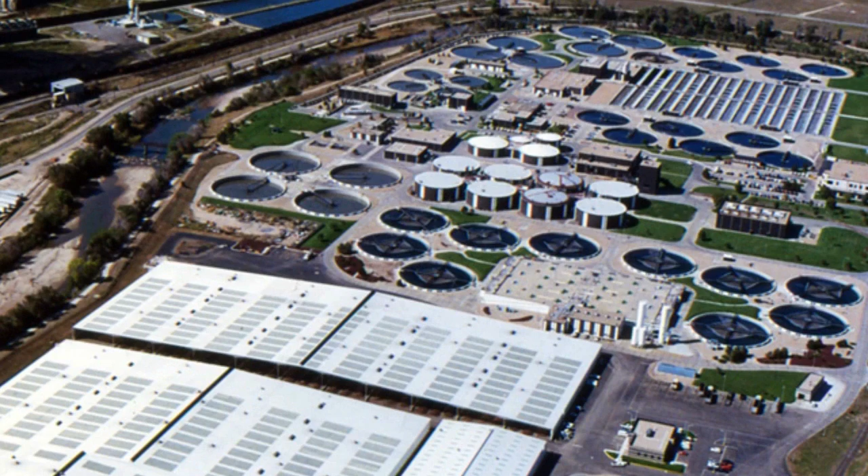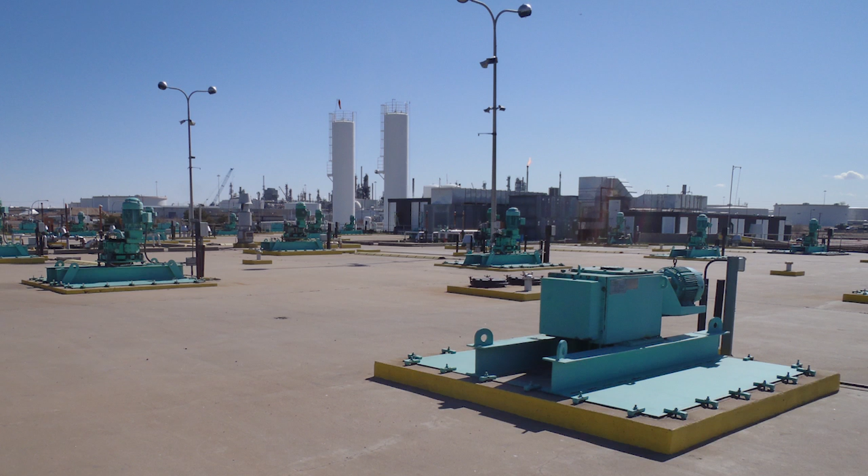Since the 1970s, the Robert W. Hite treatment facility has been using pure oxygen-activated sludge to treat nearly half its daily flow. While a state-of-the-art treatment process in its day, changing nutrient requirements and regulations are driving public agencies like the district to find new answers to treatment challenges.

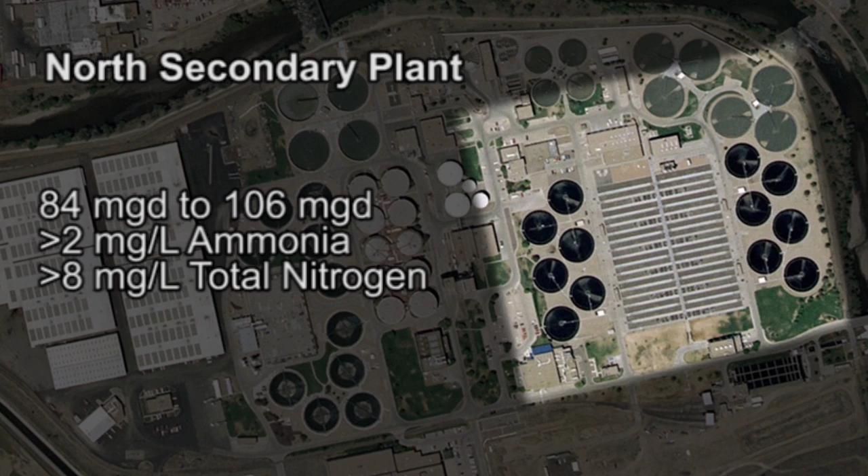The district has been planning for greater nutrient removal since 2004, when it hired Carollo engineers to design modifications to the North Secondary Complex. As part of that project, Carollo introduced a novel CaRRB side stream treatment process capable of removing 85% of return ammonia loads at half the cost of conventional treatment. CaRRB also supercharges the main process through bioaugmentation.

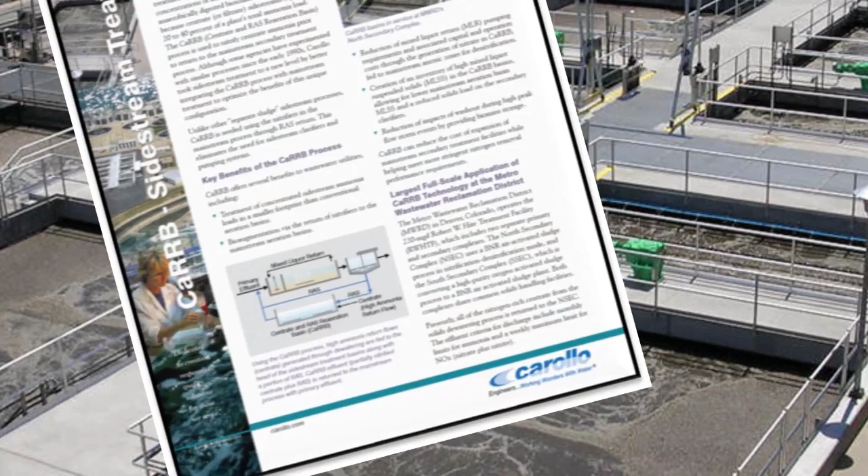Several years later, Carollo again helped the district with design and construction of the South Secondary Biological Nutrient Removal, or BNR system, to replace the now obsolete pure oxygen technology. The South Secondary improvements required initial demolition and clearing of composting warehouses to make way for the new BNR-activated sludge system. Carollo modified half of the pure oxygen facility at a time so the plant could remain in service.

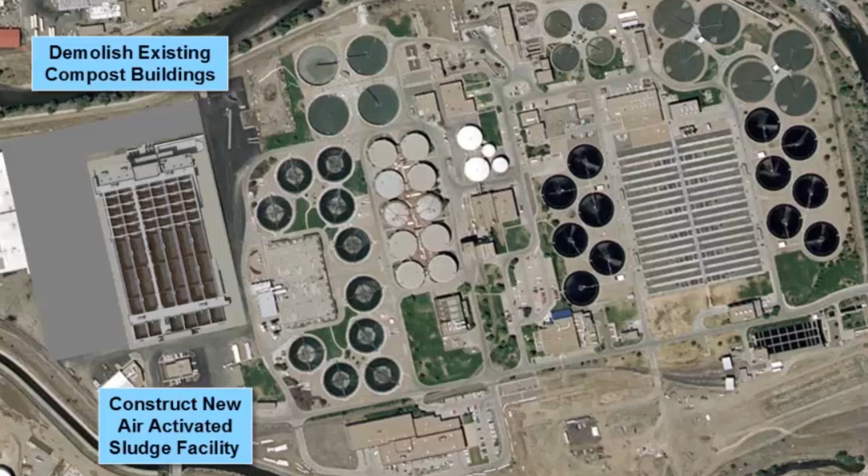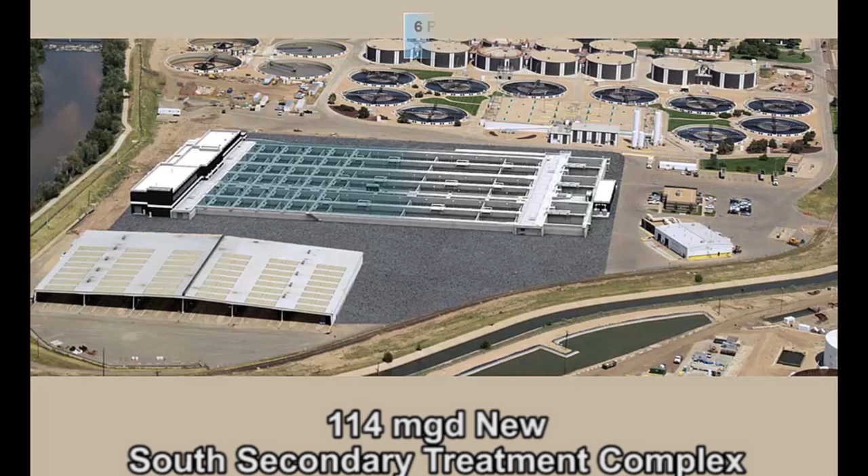The new 114 MGD South Secondary Treatment Complex consists of 6 parallel aeration basins, filling the space of 3 football fields. These massive basins took 74,000 yards of concrete to build, enough concrete to fill a sports arena 125 feet deep. The aeration basins receive oxygen from a large blower building capable of producing 145,000 cubic feet per minute of air.

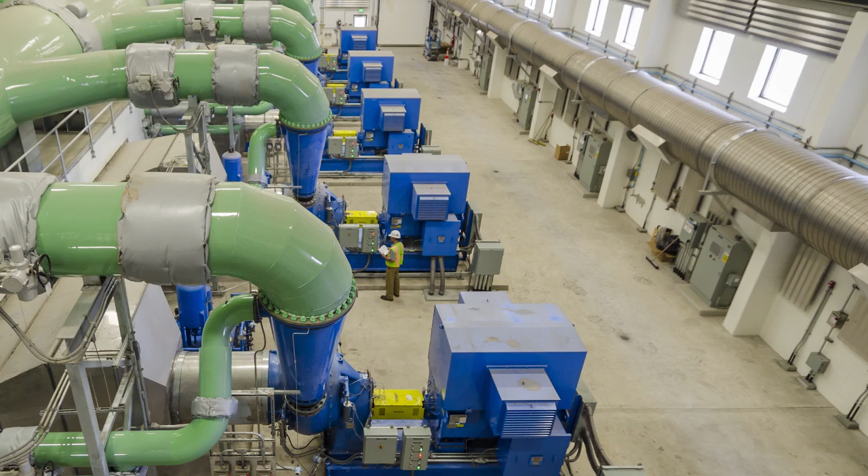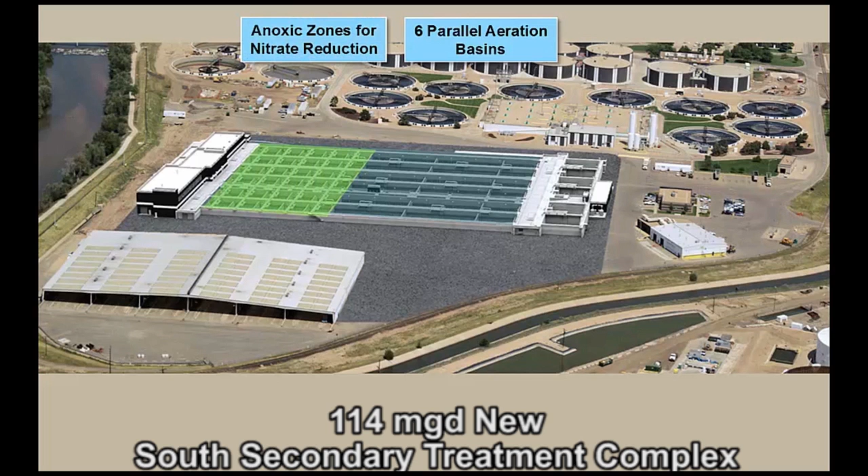5 high-speed, high-efficiency single-stage blowers are driven by 2,000 horsepower motors, sending air to more than 53,000 membrane disc diffusers. Specially designed walls and anaerobic anoxic zones provide nitrate reduction and, in the future, will remove phosphorus from the wastewater stream. The new process offers the flexibility to operate under a variety of advanced configurations, allowing the district to accommodate current and future treatment requirements.

The facility also includes a state-of-the-art 280 million gallon per day pump station that lifts primary effluent to the new aeration basins. Each of the 5 56 million gallon per day pumps is powered by its own 450 horsepower motor.

The main power distribution center is the hub of the plant's central nervous system. Miles of wiring is routed through a roller coaster of cable tray to supply power to treatment processes, monitoring equipment, and even the lights and climate controls for the administration buildings.

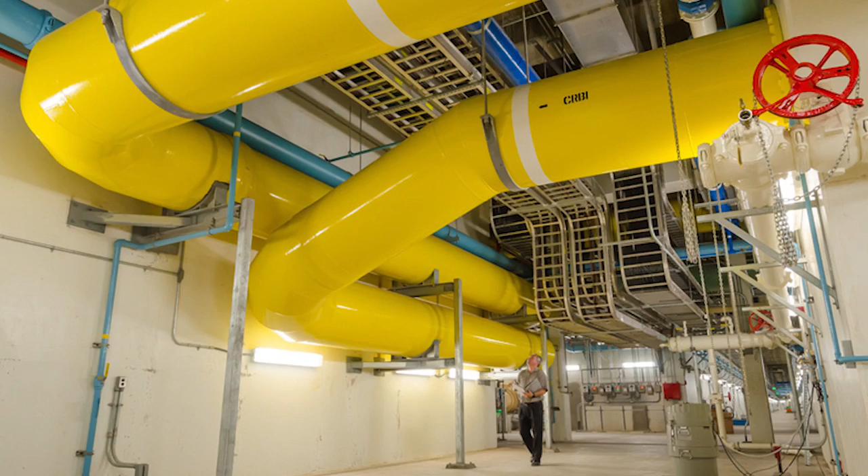Piping and equipment galleries feed each aeration basin and controls flows to treatment zones to create high-quality effluent for reuse or disposal. To save on capital costs, Carollo repurposed the old oxygen aeration basins to serve as a new sludge return pump station, which splits return flow to the rehabilitated clarifiers for further treatment.

Prior to new plant operations in 2013, effluent ammonia ranged from about 9 to 15 milligrams per liter. After startup, effluent ammonia dropped to less than 1 milligram per liter. Similarly, effluent nitrogen ranged from about 10 to 20 milligrams per liter, dropping to just 3 to 5 milligrams per liter with the new facility in service.

Simply put, the new BNR process has reduced effluent nitrogen discharge to the South Platte River by more than 4 million pounds per year. Besides a need and desire to protect the environment, the district's modifications are consistent with the 5 major trends in the wastewater industry, which includes nutrient reduction and recovery, energy conservation and production, intensification, sustainability, and community enhancement.

In recognition for the district's stewardship of the environment and its innovative use of technology, the district was awarded the prestigious 2017 Grand Prize for Design by the American Academy of Environmental Engineers and Scientists.

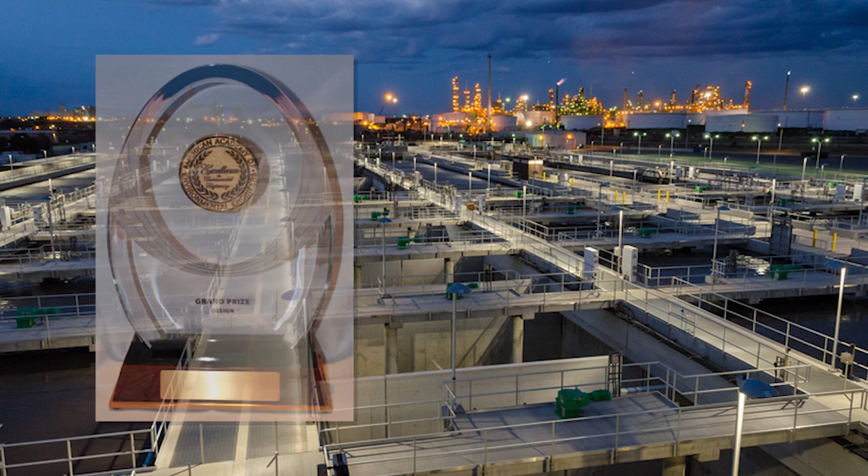The extremely low unit construction cost of less than $1.50 per gallon provides an example for other Rocky Mountain Front Range communities who are faced with increasingly stringent nutrient requirements. And this project will serve as a benchmark for public agencies of all sizes across the country and around the world.

At Carollo, water is our focus, our business, and our passion. Being part of innovative treatment projects like this affirms our commitment to our clients and our communities and helps us move closer to our goal of working wonders with water.